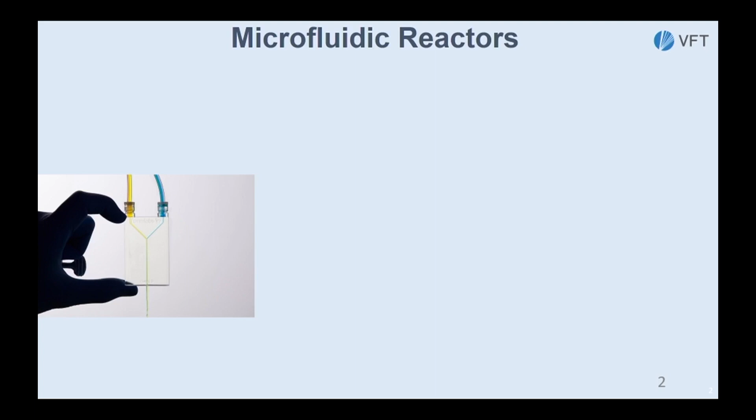So what we've done is we've taken the idea of microfluidics and scaled it up into something that is scalable into industrial size. So you can imagine trying to scale this device, which probably processes 500 microliters a minute, into hundreds of gallons a minute. It's not a practical way to do it, which is why it's been used for lab on a chip and inkjet printers, other things where very small volumes are what we're working with. But there's a need in the industry to do other things.

So we have taken advantage of this microfluidic property, and we have scaled that up into massive microchannel reactors. We've done that by taking wires or fibers and putting them very close together where we can control the distance between the fibers such that they mimic the lengths that are found in microfluidic devices. So we can have channels of virtually any width we would like. 50 micrometers is a really common number.

So once we do this and we can pack these fibers in, we now have the ability to pack more and more fibers into an increasingly larger device. So we end up here building different columns that have different lengths and different diameters, and now we're into the gallons a minute, tens of gallons a minute, and hundreds of gallons a minute type of processing flow using the advantage and the interesting properties of microfluidic devices.

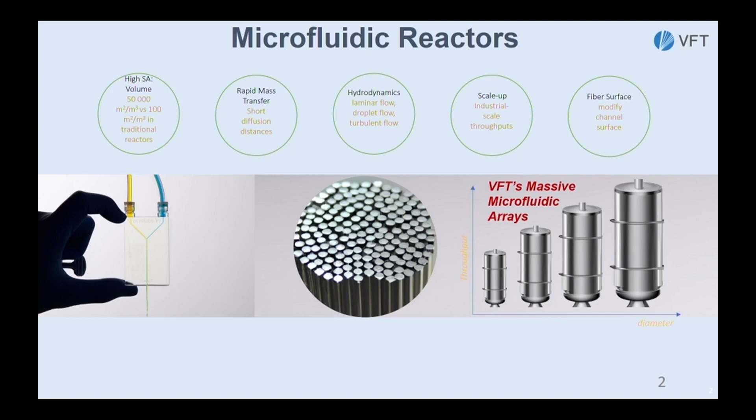Lastly, what we have been able to do, and there's a second talk if you want to think about this, in the second biofuels area, we've been able to modify the surface of the fibers. So normally we are talking about the microfluidic reactor as if it's a reactor. It's two walls and something happens inside. We have now been able to change the walls to make the walls participate in the reaction. We're able to put catalysts on the walls and other things on the walls of these little reactors. So now it is more than just a vessel. It is a vessel that has attributes that can help with the reaction in some sense.

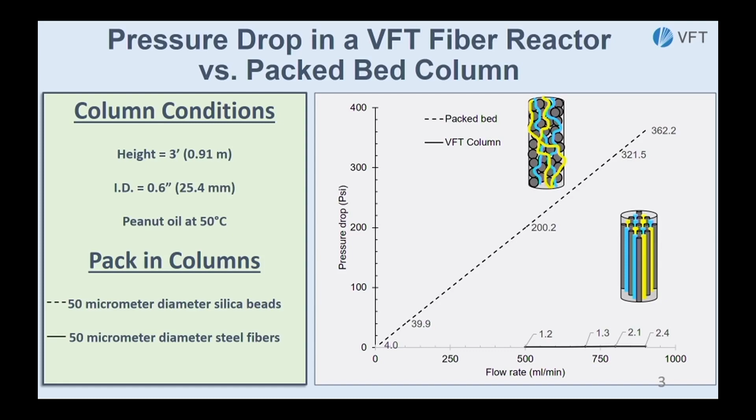But when we do the same exact flow in a microfluidic fiber reactor, the pressure drop is not 200 psi, it's 1.2 psi, or 2.4 psi when it's 360. That's because we have these channels that go all the way through. So the liquids can follow a highway all the way from top to bottom and don't have to go through all these barriers to get there. So even using the same size fibers as the silica beads, the pressure drop is very low and the throughput then can be very high.

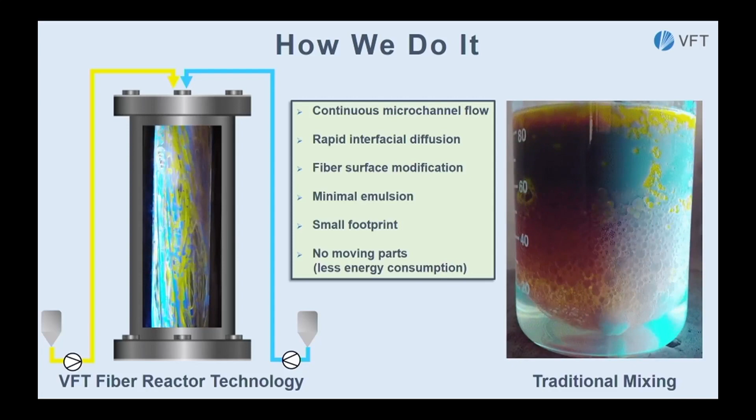For a fiber reactor, we don't get that. It's laminar flow. We don't have this high mixing. So we really don't form emulsions. So since we don't form them, they don't have to be removed later through a big settling vessel. It's very small footprint, and there's no energy to do this. You just pump it through. The pressure drop, as we just went through, is very, very small. So it's just the energy to pump the liquids through the column, as opposed to the energy for an agitator to stir the material and force that contact through mechanical energy.

So we already heard a little bit about the market for renewable diesel. I'm not going to cover that. And we also heard a little bit about hydrogenation. So I can kind of skip through that. But just really quickly, most of you have vegetable oil experience. I'm expecting a lot of you have been in food. Hydrogenation of vegetable oils, we do a lot. And in that process, we use a nickel or platinum catalyst, but generally we have a finely dispersed Raney nickel that we pour in at a very small concentration into a reactor with oil, pump hydrogen through it, and we do our reaction. And then at the end, we filter the nickel out and throw it away.

In renewable diesel, that's not how they do it. They have a catalyst that's fixed on a solid bed that has to last for 1 to 4 years. Otherwise, the economics fall apart. It's a very expensive catalyst. The issue is that catalyst is poisoned just like the nickel or platinum would be if you're making vegetable oil for food. That same poisoning happens where all the metals, phosphorus and chlorides in particular, will poison that catalyst over time. And they will basically destroy the catalyst's ability to function. So that catalyst is supposed to last 3 years, may last a year or a half year or 3 months or 3 weeks at times. So it's a real big problem to get all those contaminants out of the oil.

What the industry has been using to start up is RBD soybean oil. That's really the gold standard. That's a food-grade oil. We've done all the processing. It is really clean oil. The problem is, as we just heard, the carbon intensity of that isn't great. It's bad. So we want to get lower carbon intensity.

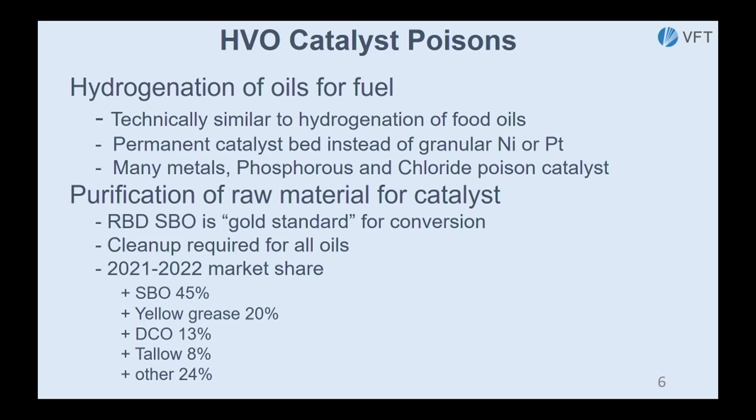And so all the oils we use need to be cleaned up. Soybean oil has already been cleaned up with RBD. It's an expensive process, but it works. And we already saw the market share of these oils, and as we heard, soybean is disfavored because it has this high CI value, and the other ones are trying to take over.

So what we did was we went after DCO, or corn oil, and we heard that's the oil taken out of distillers' residues, or fermentation residues. Today, there's about 600 million gallons of that produced. It has a CI score that's about half of that of soybean oil. It is increasing over time.

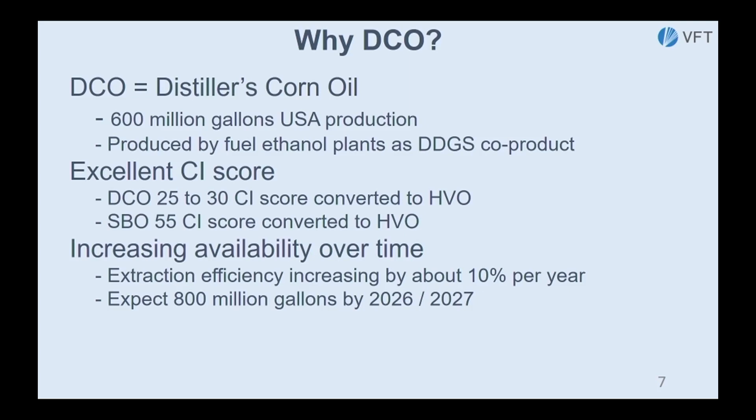We're expecting by 2026 or so to have 800 million gallons produced, not because we are necessarily using more grain, but because the extraction techniques are getting better over time to remove it from the grains. So DCO is a meaningful, large volume raw material that has a low CI score that is very amenable to hydrogenation to make diesels and jet fuels.

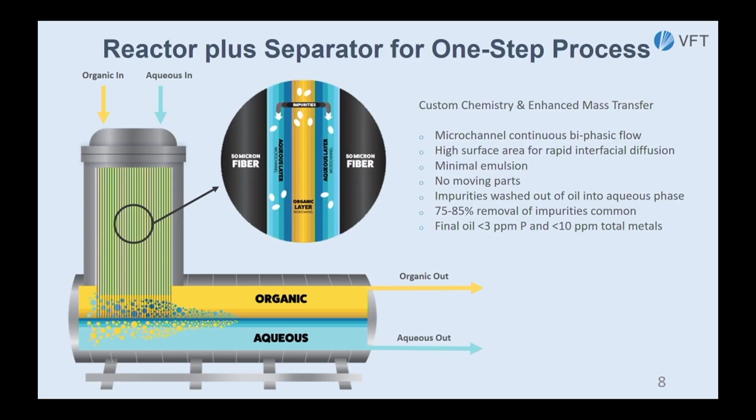And in this application, we're basically getting between 75 and 85% of the contaminants removed in a single pass. Generally, we're getting the oil below 3 ppm phosphorus and below 10 ppm total metals, which is the latest spec we've been given by renewable diesel plants, although that has moved down over time. And we've been able to adapt the technology to make it better as needed.

So here are some examples. Just for time's sake, I want to just look at two of these. One showing the phosphorus removal in a step. It started at 370 ppm. This actually wasn't DCO, but it was a similar oil. And after the first wash, we took the phosphorus from 370 down to 9.1. Wash 2, 8.4, wash 3, 8.4. Meaning we basically got everything that was water soluble on the first shot. Doing more and more didn't really help.

FFA, we had a similar thing where we started at 13.5% FFA. We got 10.5 left in the oil after the first wash, and further washes didn't change that. This is important because this means that most of the oils are kept in the oil. There's very little yield loss into the water phase.

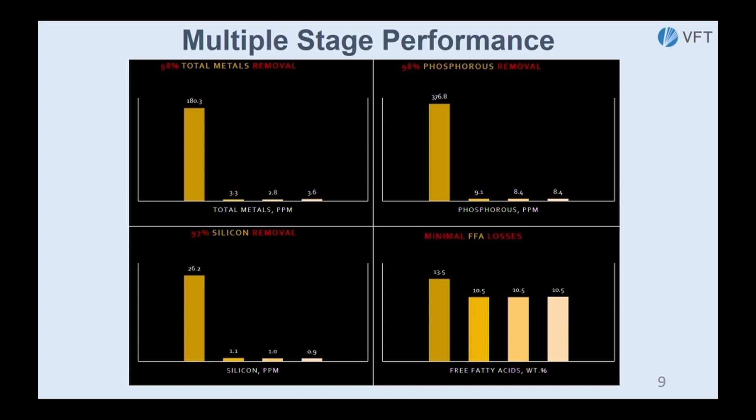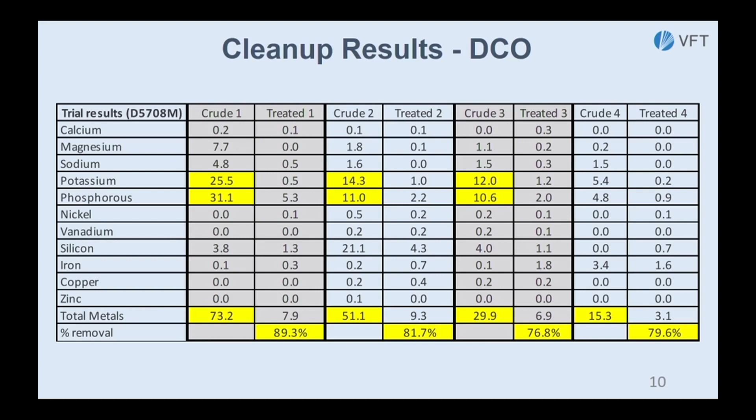Crude 3 was cleaner yet, about 30 ppm starting, 6.9 finishing, and crude 4 was the cleanest we saw, 15.3 start and 3.1 end. And the important point is that the RD and SAF producers want that number today to be below 10. So in all these cases, a single pass got us below 10. We've also processed more difficult oils that start higher. So if we go back here, this one started at 73 parts per million. The second set started at 650 parts per million.

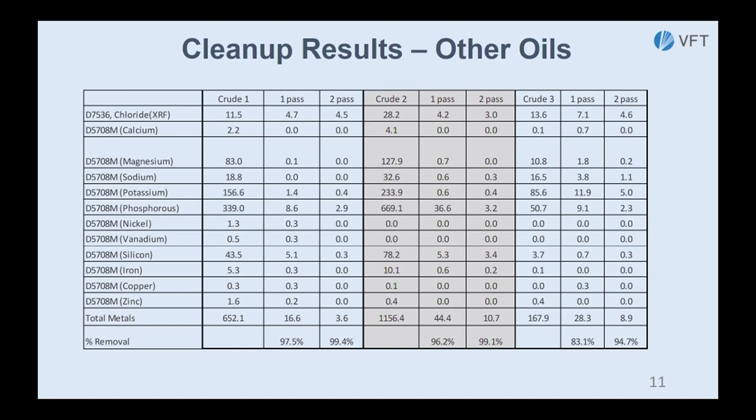First pass took it down to 16. We washed it a second time, got down to 3.6. Crude number 2 started over 1,000 ppm. We got down to 44 on pass 1 and 10.7 on pass 2. Crude 3 was the 170 starting, 28 pass 1 and 8.9 pass 2. So even if the oil is really dirty, it is possible to take care of this with a water wash.

So these things are commercially deployed. We have 2 commercial deployments right now. They've been running both for a little over a year, almost 2 years. And there's 2 scales. One is a 5-gallon-a-minute system, 5 gallons a minute of oil. The other is 16 gallons a minute of oil. And in both cases, they commercially produce oil that's below 7 ppm total metals, and generally we can get the phosphorus below 1.5 ppm.

What's interesting about this, which is different than RBD soy or most of the techniques that we talk about for cleaning up oils, is we don't use any solid absorbents. There's no bleaching clay, no silica, no diatomaceous earth, nothing. This entire process is done with RO water. That's the only ingredient.

For those of you that are in the space of dealing with these clays, it is a problem. It's a problem because you got to buy them. It's a problem because they lose yield because the clays absorb some of the oil that you don't want to have absorbed. And then maybe the biggest problem is you got to dispose of the stuff. And that's not always easy. But this is just water. We had very little yield loss.

And the other part about this at an ethanol plant is even if we have some yield loss into the water phase, that water isn't thrown to a wastewater treatment. That water runs back to the front of the plant for more fermentation, so the oil that is in there gets another shot. So we don't actually lose it then either.

It's a very low OPEX cost because we're just using RO water. The OPEX to run this thing is very little energy. OPEX is less than a half penny a pound to pre-treat the oil. As I mentioned, the impurities go back to the ethanol plant as part of the distillers, so there's really no waste disposal cost at all, which is one of the reasons the operating cost is as low as it is.

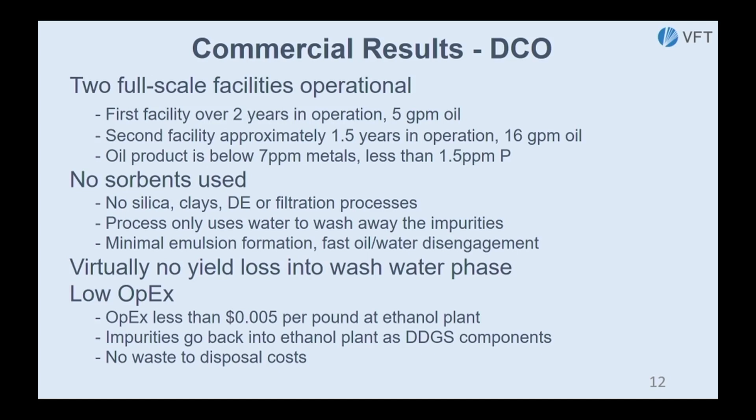Here's a picture of the system that we've installed in these 2 places. It's about 3 meters long. It's about half a meter in diameter as a column, and the column length is a little under 2 meters in active surface area. And this is a sight window on the end of the reactor, and in the sight window we can see that there's a definite phase of the oil up top and water on the bottom. So we can use the sight glass to see, is there any emulsion forming, and do we need to make adjustments to make it work better or not?

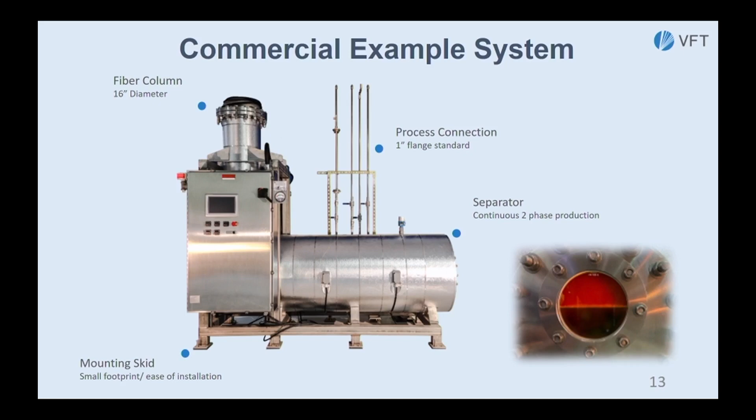And so right now almost all the applications have been with steel. 304L is what we've been using, but there are literally hundreds of materials that can be drawn into fibers that we can modify and put into these reactors. 316L, Hastelloys, polymers of various types, other materials, copper, volcanic glass, carbon fibers. There's just a whole bunch of fibers that you can buy and have tailored to whatever size might be needed to get the job done.

The magic really is how we do the internal packing. So I made it sound like it's just simple, straight things. It's easy. There's more behind that we haven't disclosed, but it does work really well. And we can adjust that matrix and all the fibers and a bunch of little things to produce a material that's needed. And these systems are basically built for purpose. It's not like a toaster where you just go buy any toaster. We make a toaster for the bagel you have.

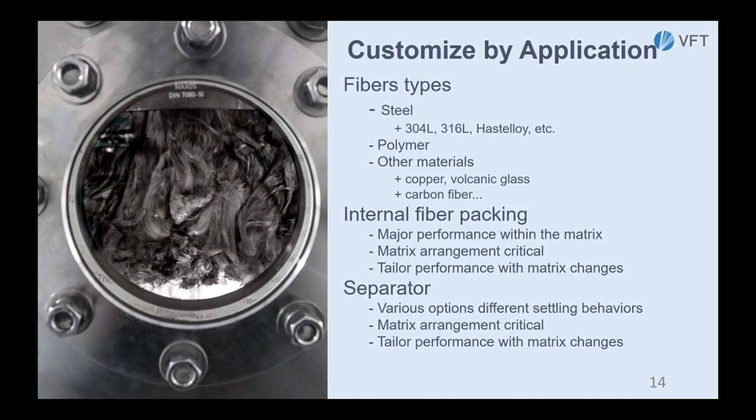It's the right size. And a separator also has some interesting points about it to separate that water from the oil. And what I'm talking about here is DCO, but we have other applications of interest that we've used.